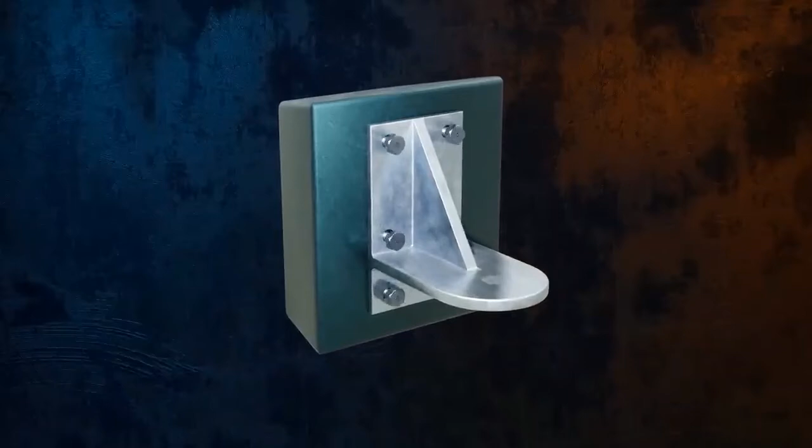We know that when we apply loads to an object, like this bracket, if we keep increasing the magnitude of the load, at some point the material will fail. But how can we predict when static failure will occur? What level do the stresses in the object need to reach for it to fail?

First, we need to define what failure is. For ductile materials, failure is usually considered to occur at the onset of plastic deformation, and for brittle materials, it occurs at fracture. These points are easy to define for a uniaxial stress state, like a tensile test. They occur when the normal stress in the object reaches the yield strength of the material for ductile materials, and the ultimate strength for brittle materials.

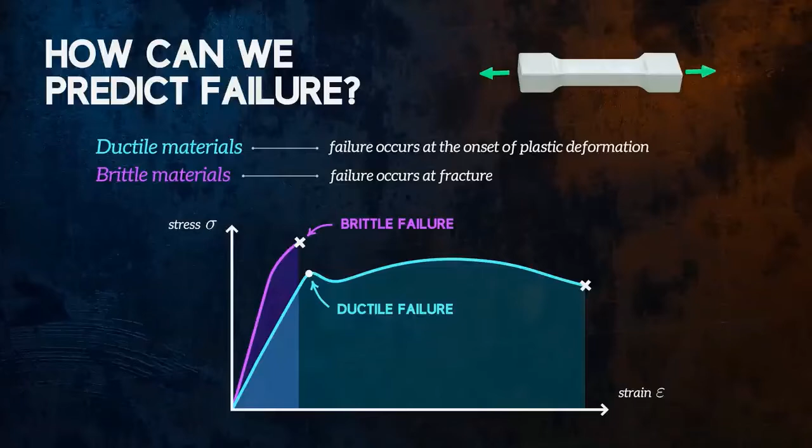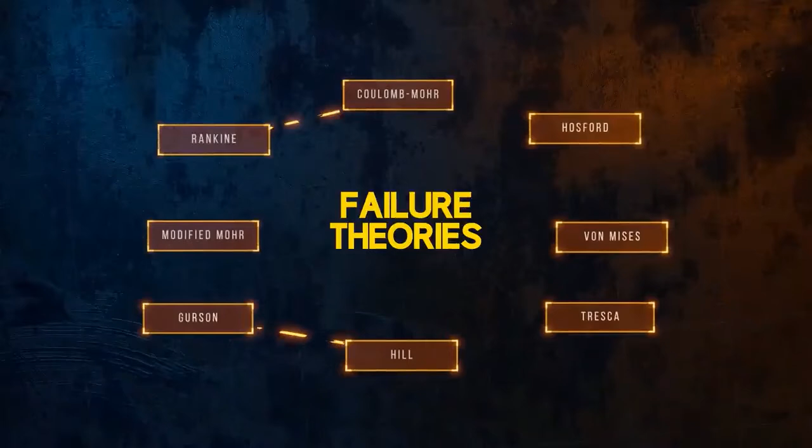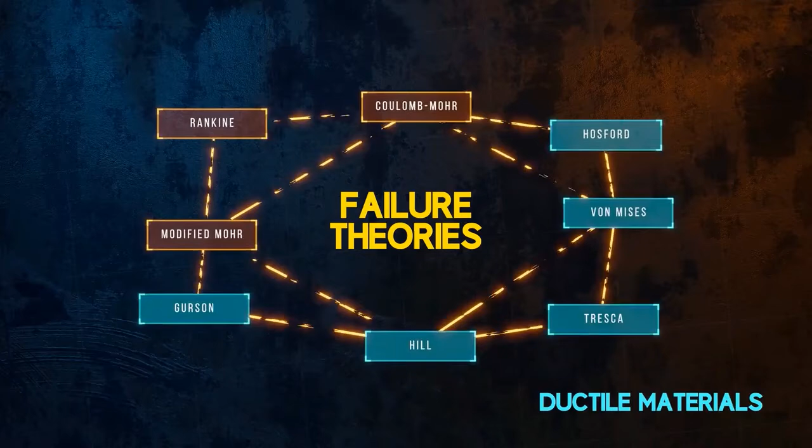But for a more complex case of triaxial stress, predicting failure is much less straightforward. In fact, it's so difficult to predict that we don't have one universally applicable method. Instead, we have to predict failure by selecting the most suitable one of a range of different failure theories, each of which we know works relatively well under certain circumstances, based on experimentation. Because they fail in fundamentally different ways, failure theories which apply for ductile materials usually aren't applicable for brittle materials, and vice versa. So what does a failure theory do?

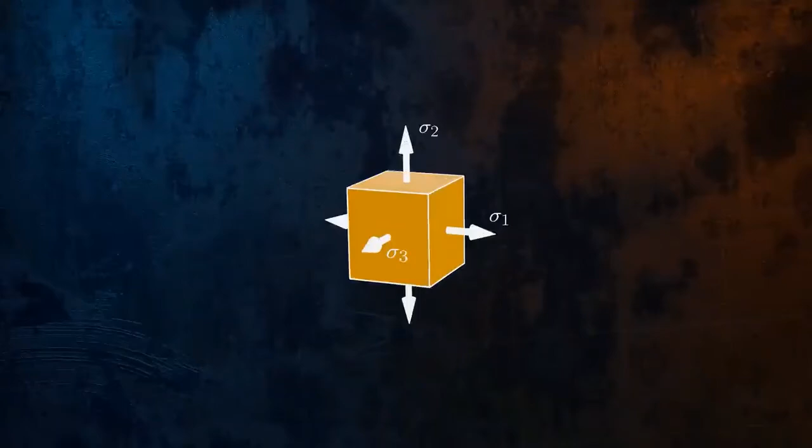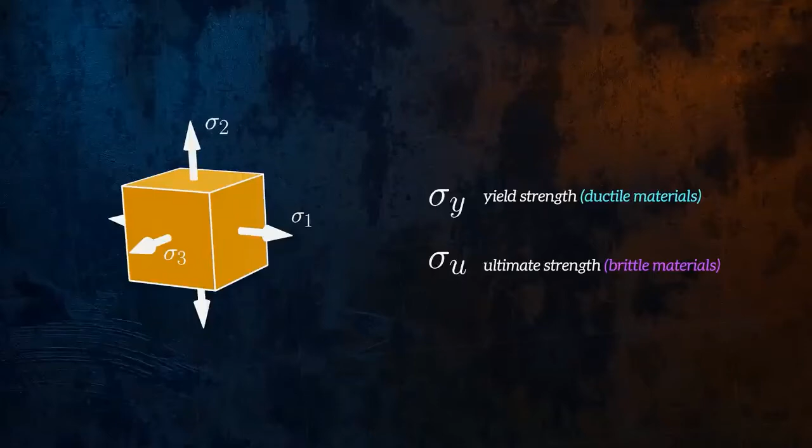It's quite simple. It allows us to predict failure of a material by comparing the stress state in the object we are assessing with material properties that are easy to determine, like the yield or ultimate strengths of the material that we can obtain by performing a uniaxial test. The stress state at a point can be described using the three principal stresses. So most failure theories are defined as a function of the principal stresses and the material strength.

Probably the simplest failure theory is to say that failure occurs when the maximum or minimum principal stresses reach the yield or ultimate strengths of the material. This is called maximum principal stress theory, or Rankine theory. Although it's simple to apply, it's not actually a great failure theory, particularly for ductile materials, for reasons I'll explain later. Let's look at some better failure theories for ductile materials.

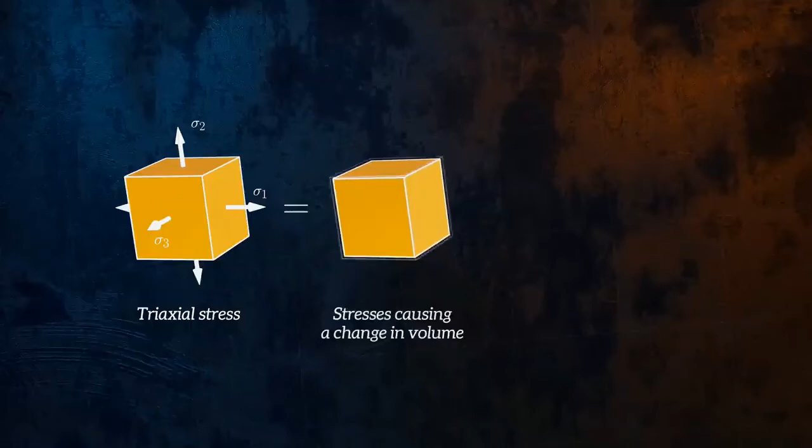Any good failure theory needs to be consistent with experimental observations we can make about how materials fail. There is one key observation that failure theories for ductile materials need to capture, which is the fact that hydrostatic stresses do not cause yielding in ductile materials. Let me explain. A general triaxial stress state, like the one shown here, can be decomposed into stresses which cause a change in volume and stresses which cause shape distortion.

Stresses that cause a change in volume are called hydrostatic stresses, because that is the type of stress acting on an object submerged in liquid. For a hydrostatic stress configuration, the three principal stresses are always equal, and there are no shear stresses. For a triaxial stress state, we can calculate the hydrostatic component as the average of the three principal stresses.

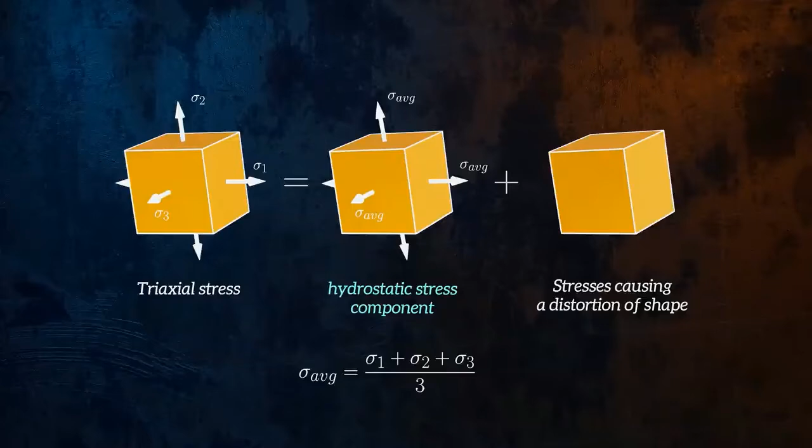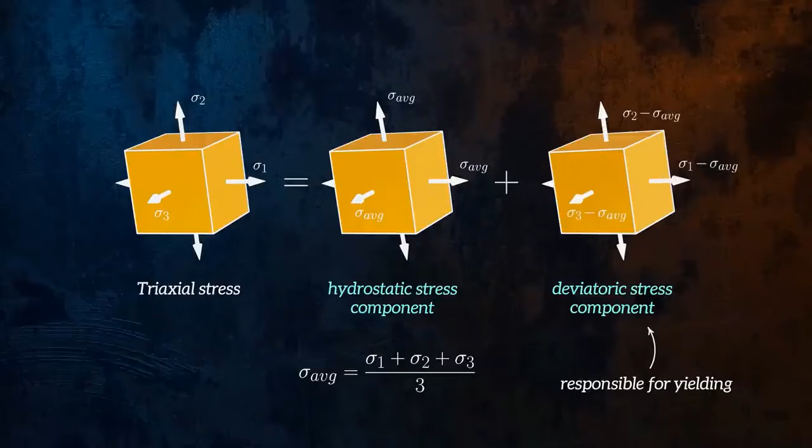The mechanism that causes yielding of ductile materials is shear deformation. Since there are no shear stresses for a state of hydrostatic stress, this component can be very large and still not contribute to yielding. Yielding is only caused by the stresses which cause shape distortion. These are called deviatoric stresses. The deviatoric component is calculated by subtracting the hydrostatic component from each of the principal stresses. The hydrostatic and deviatoric components can be expressed in matrix form, like this.

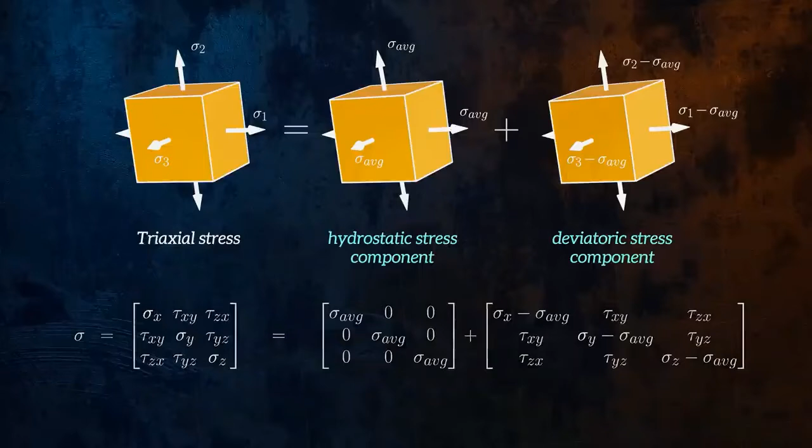Here we have described the stress state using the principal stresses, but we could also describe it for an arbitrary orientation of the stress element. It can be helpful to use Mohr's circle to understand the hydrostatic and deviatoric components of a triaxial stress state. For a hydrostatic stress configuration, there are no shear stresses, and so Mohr's circle reduces to a single point, equal to the average of the three principal stresses. Shifting Mohr's circle horizontally represents an increase in the hydrostatic component. And increasing the radius of Mohr's circle without changing the average stress represents an increase in the deviatoric component.

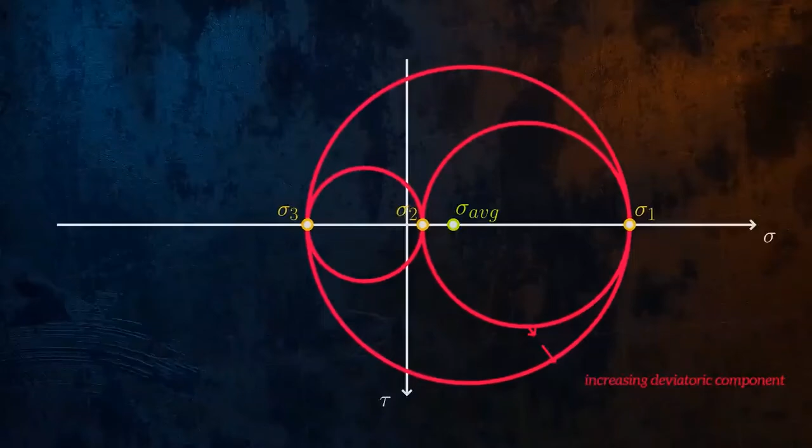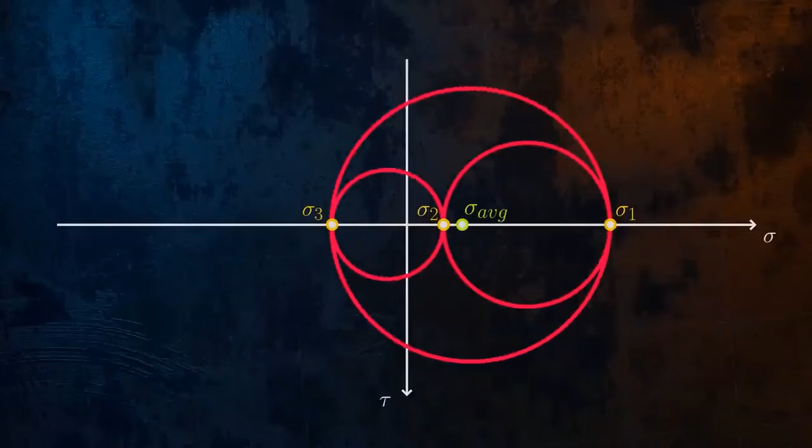Since failure of ductile materials only depends on the deviatoric component, a good failure theory for ductile materials should produce the same result regardless of where Mohr's circle is located on the horizontal axis. This explains why maximum principal stress theory is not a good failure theory for ductile materials. It isn't consistent with the observation that yielding is independent of hydrostatic stress.

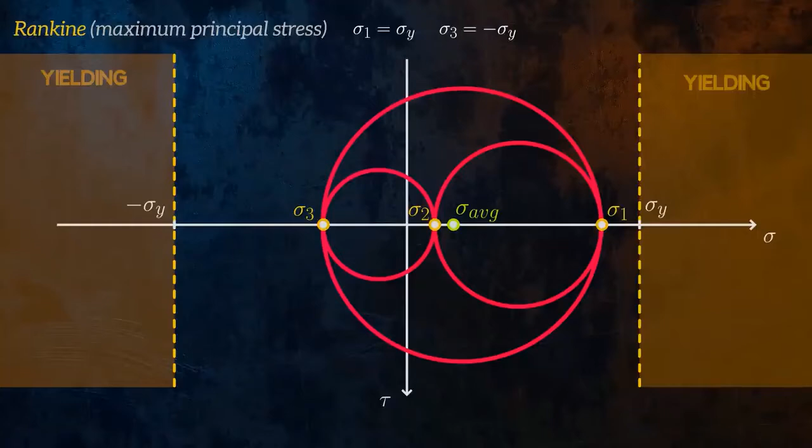Two failure theories which are consistent with this observation are the Tresca and von Mises failure criteria. These are the two most commonly used failure theories for ductile materials. Let's start with the Tresca failure criterion, which is also called the maximum shear stress theory. It is named after the French engineer Henri Tresca, and it states that yielding occurs when the maximum shear stress is equal to the shear stress at yielding in a tensile test.

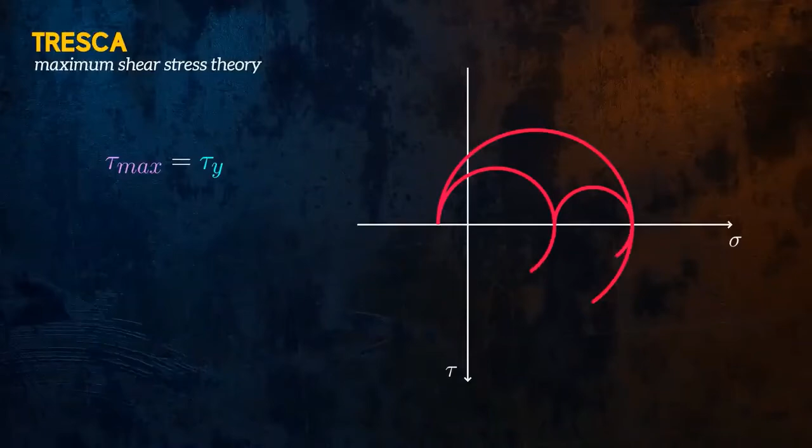This can be defined mathematically, like this, and graphically using Mohr's circle, like this. This theory is consistent with the observation that hydrostatic stresses don't affect yield. It doesn't care where Mohr's circle is located on the horizontal axis.

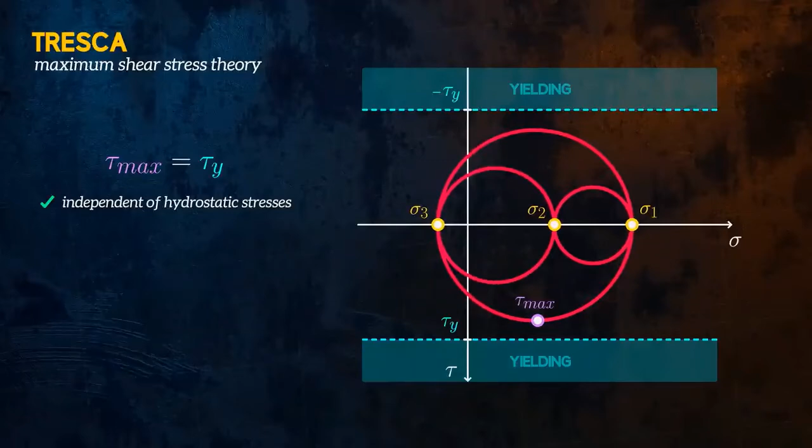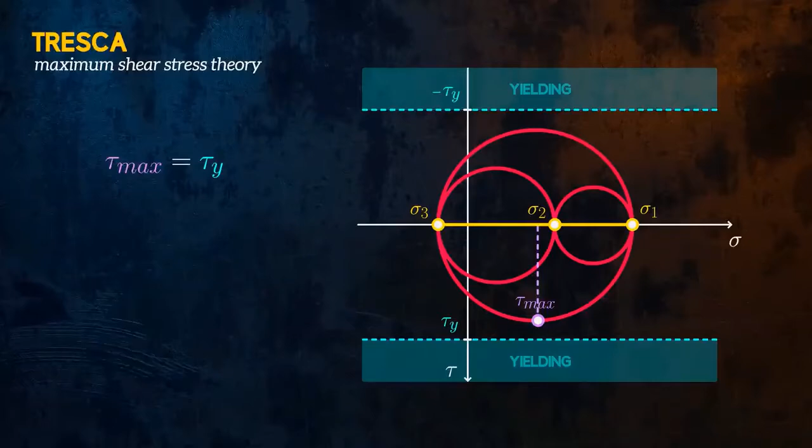It's common to express this theory as a function of the principal stresses, instead of as a function of the shear stresses. We can see, based on Mohr's circle, for a triaxial stress state, that the maximum shear stress is equal to the radius of the outer circle, which is the difference between the maximum and minimum principal stresses, divided by 2. Mohr's circle for a uniaxial tensile test at yielding looks like this.

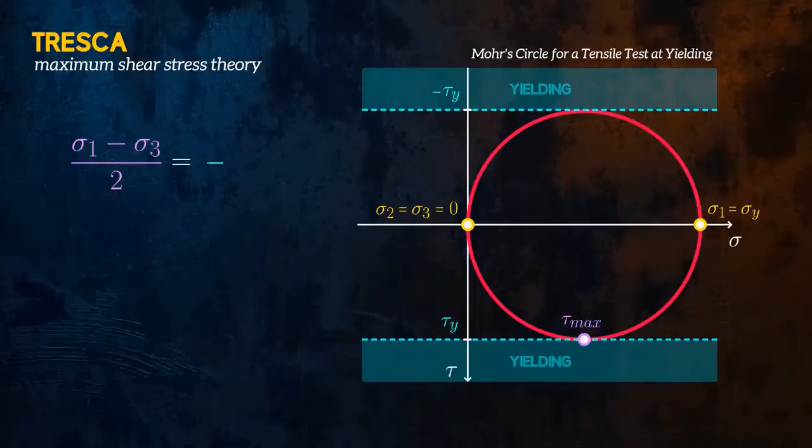The intermediate and minimum principal stresses, sigma 2 and sigma 3, are equal to 0, and the maximum principal stress, sigma 1, is equal to the yield strength of the material. The shear stress at yielding is equal to half of the yield strength of the material, so we can rewrite our equation to obtain the standard formulation for the Tresca theory.

Let's look at the von Mises failure criterion next, which is also called the maximum distortion energy theory. It was initially developed by the Austrian scientist Richard von Mises, but a number of others were involved in refining it, so it is sometimes called the Maxwell-Huber-Hencky-von Mises theory. It states that yielding occurs when the maximum distortion energy in a material is equal to the distortion energy at yielding in a uniaxial tensile test.

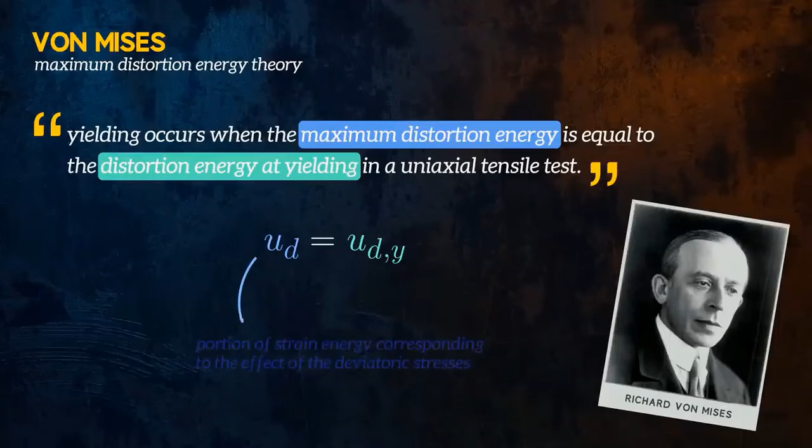So what is the distortion energy? It is essentially the portion of strain energy in a stressed element corresponding to the effect of the deviatoric stresses. The distortion energy per unit volume can be calculated from the principal stresses using this equation. We know that at yielding during a tensile test, the maximum principal stress is equal to the yield strength of the material, and the two other principal stresses are equal to 0. So we can calculate the distortion energy at yielding in a tensile test by plugging in the appropriate principal stress values.

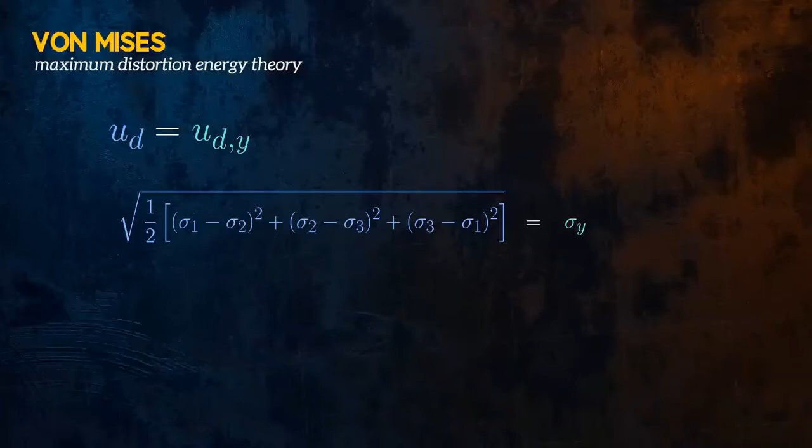And by equating the distortion energy at yielding with the general equation for a triaxial stress state and rearranging a bit, we get an equation that defines the von Mises failure criterion. Again, we can see that this theory considers the difference between principal stresses and so is independent of the hydrostatic stress. The term on the left is often called the equivalent von Mises stress. If it is larger than the yield strength of the material, yielding is predicted to have occurred.

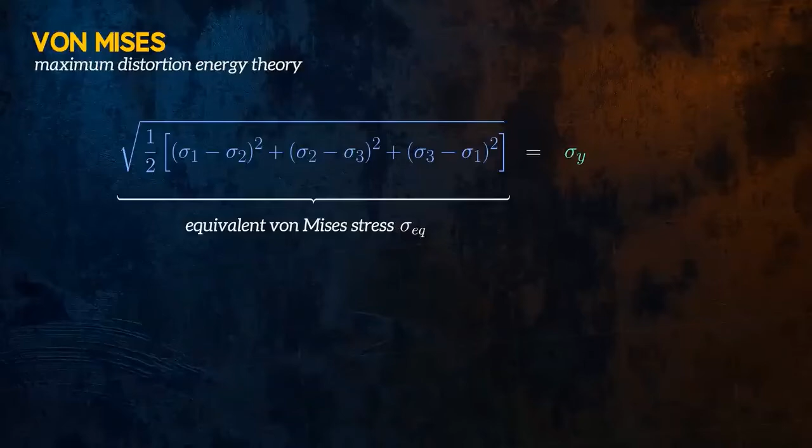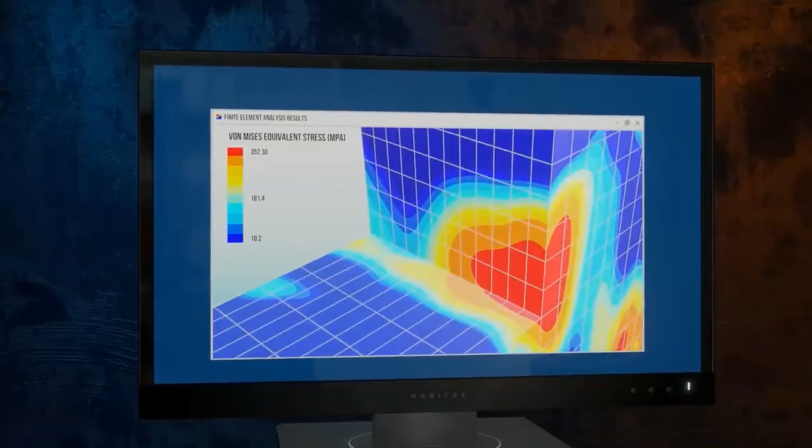The equivalent von Mises stress is a common output from stress analysis performed using the finite element method. Contour plots are typically generated to show the distribution of the von Mises equivalent stress within a component, as these allow areas at risk of yielding to be identified.

When comparing failure theories, it can be useful to plot their yield surfaces. A yield surface is the representation of a failure theory in the principal stress space, which sounds more complicated than it actually is. To keep things simple, let's start by considering a plane stress case, where one of the three principal stresses is equal to 0.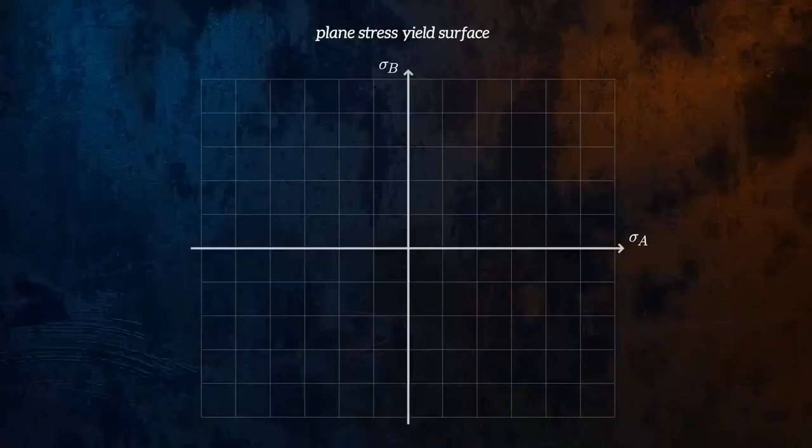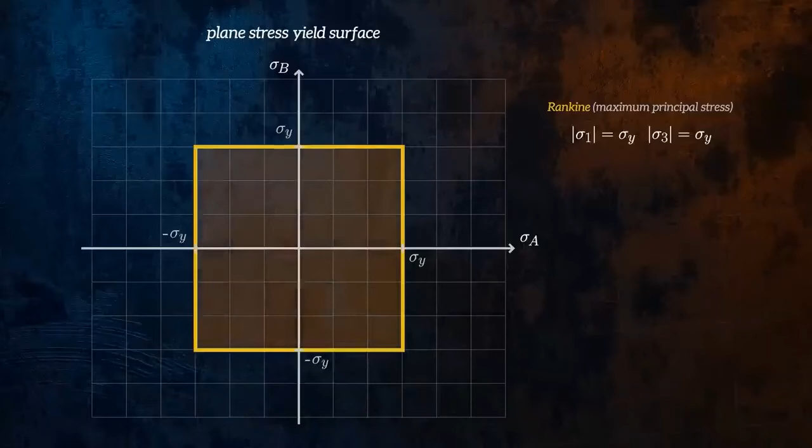The yield surface for the maximum principal stress theory is easy to plot. It says that yielding begins when either of these principal stresses is equal to the yield strength of the material, so it looks like this. Yielding is considered to have occurred when the stress state reaches this line.

Next, let's plot the yield surface for the Tresca theory. This theory states that yielding occurs when the difference between the maximum and minimum principal stresses is equal to the yield strength of the material. But it's not as simple as taking the difference between sigma A and sigma B. Plane stress is still a three-dimensional stress state.

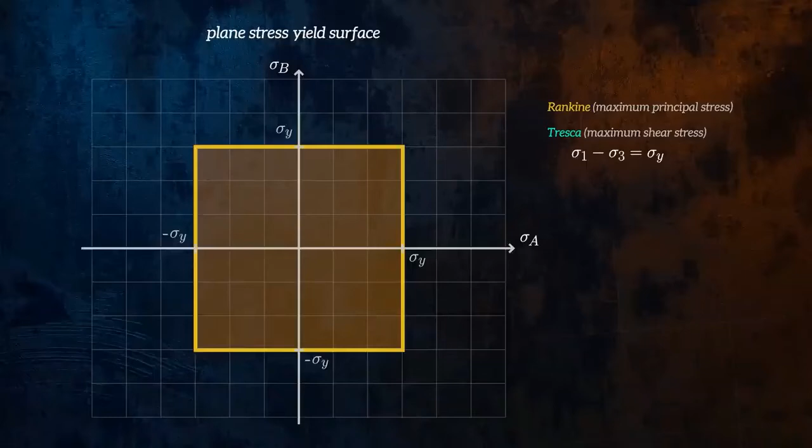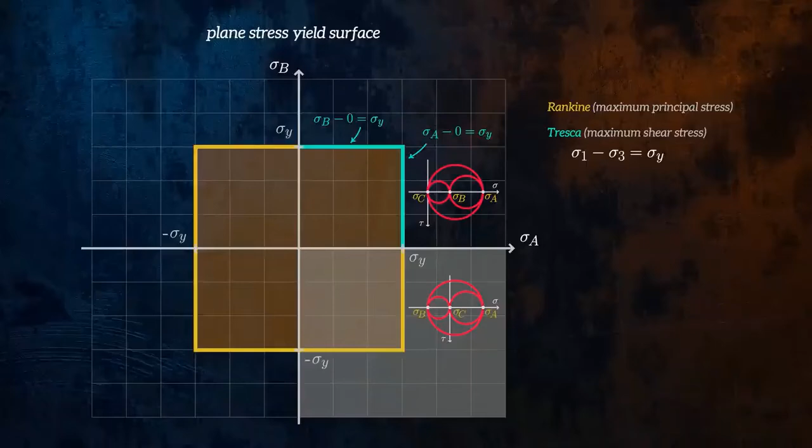In the top right quadrant of the graph, both sigma A and sigma B are positive, and so sigma C, which is equal to 0, is the minimum principal stress. The yield surface looks like this. But in the bottom right quadrant, sigma B is negative, and so sigma B is the minimum principal stress. That gives us a yield surface that looks like this. Repeating this process for the other two quadrants completes the Tresca yield surface.

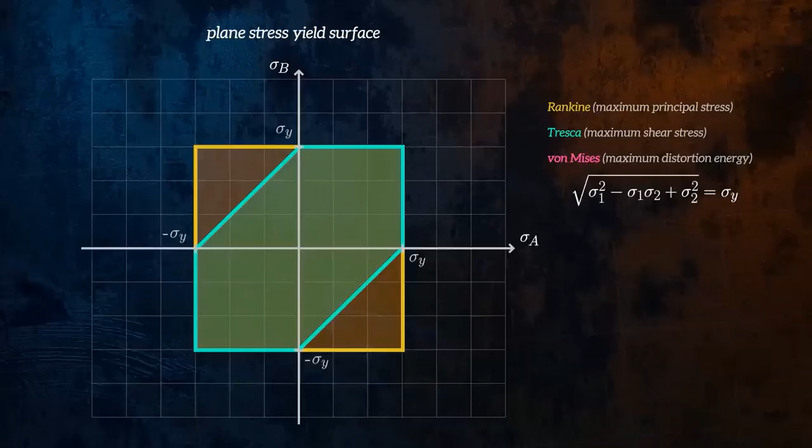Von Mises' yield theory for plane stress conditions is defined using this equation when expressed in terms of the principal stresses. We can square both sides of the equation and see that it is of the same form as an ellipse, which gives us the von Mises yield surface.

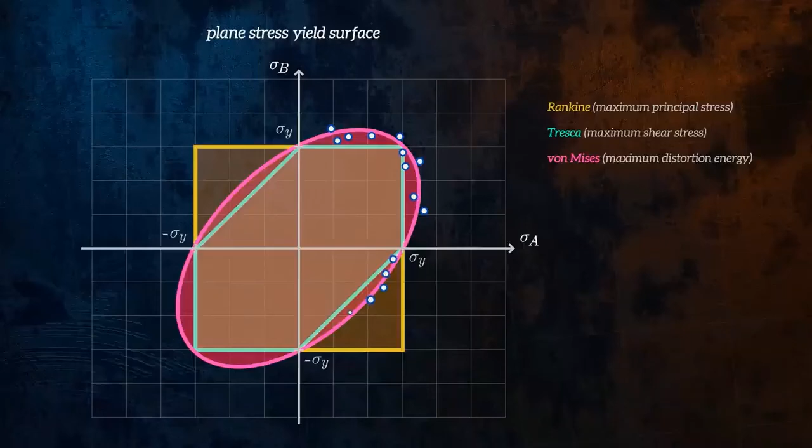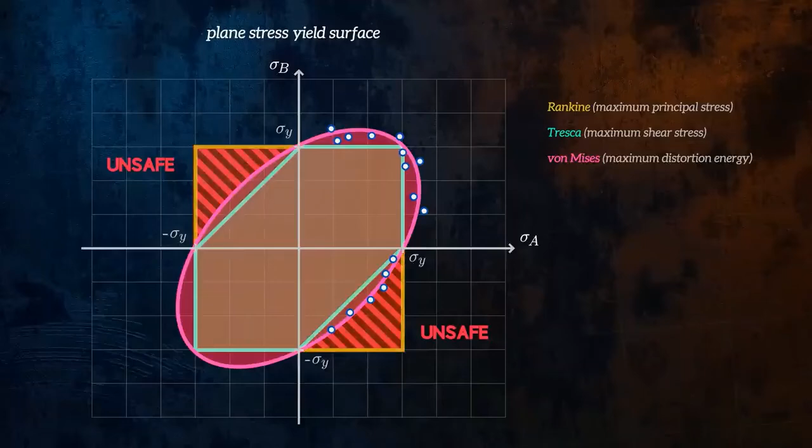Let's plot some experimental data for tests performed on ductile materials and see how each of these theories compares. It's clear that the maximum principal stress theory has large areas where its use is potentially unsafe. So let's get rid of it and compare Tresca and von Mises. Both agree well with experimental observations, although von Mises agrees slightly better. The Tresca yield surface lies entirely inside the von Mises surface, meaning that Tresca is more conservative.

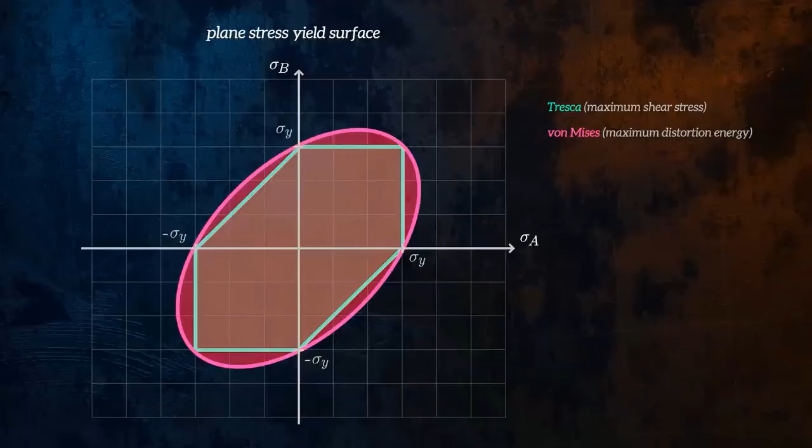If we assume that the principal stresses will increase in proportion to one another as a load is applied, and so the stress paths are straight lines, the difference between the Tresca and von Mises theories is largest for these three configurations. The maximum difference between the two theories can be calculated to be 15.5%. Von Mises is usually preferred to Tresca because it agrees better with experimental data, but Tresca is sometimes used because it is easier to apply and it is more conservative.

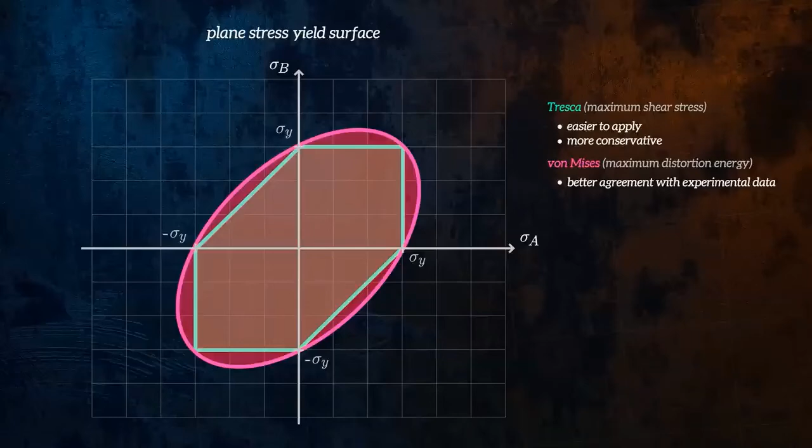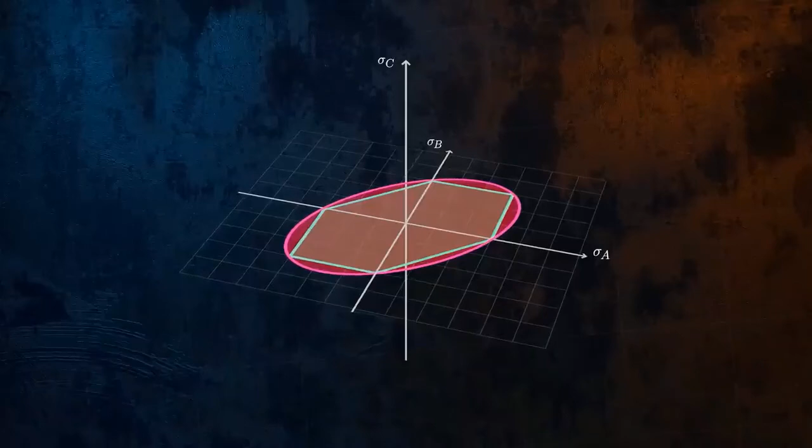So far, we have looked at a plane stress case, with sigma C equal to 0, but for a general three-dimensional stress state, sigma C will be non-zero. We know that the Tresca and von Mises yield surfaces aren't affected by hydrostatic stresses, and so to obtain the yield surfaces in 3 dimensions, we just need to extend the plane stress yield surfaces along the hydrostatic axis.

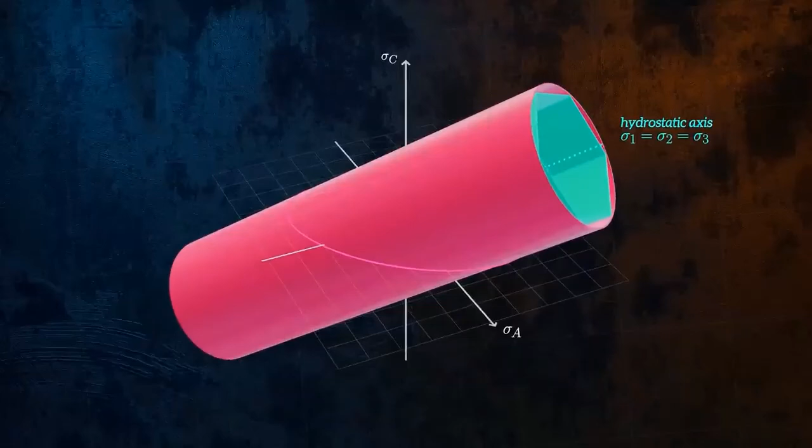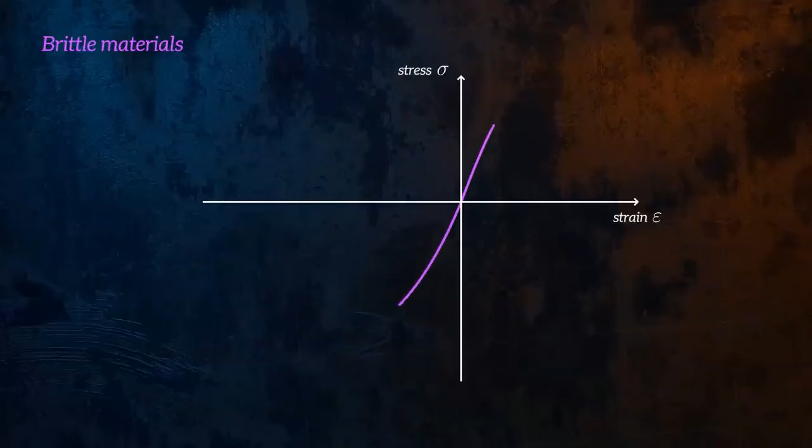Failure of brittle materials is different to failure of ductile materials. For brittle materials, failure is considered to occur by fracture rather than yielding. And unlike ductile materials, brittle materials tend to have compressive strengths that are much larger than their tensile strengths. This needs to be captured in any failure theory for brittle materials. It also means that to assess failure of brittle materials, we need to know 2 separate ultimate strengths, for tension and for compression.

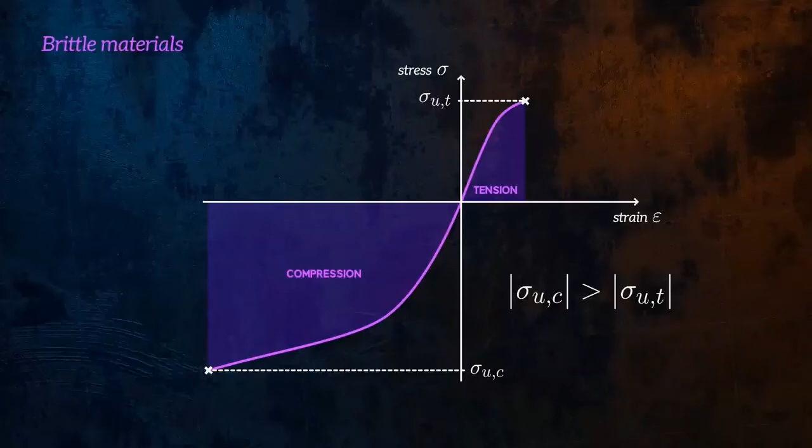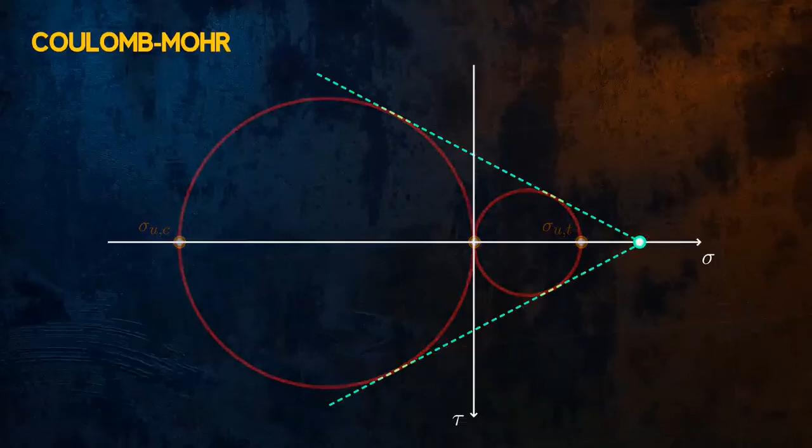Coulomb-Mohr theory is a failure theory often used for brittle materials. Unlike the theories we have seen for ductile materials, it considers failure to be sensitive to hydrostatic stresses and captures the difference between tensile and compressive ultimate strengths. The easiest way to define this theory is using Mohr's circle. We start by drawing the Mohr's circles corresponding to failure in the uniaxial tensile and compressive tests. By drawing lines tangent to both circles, we create a failure envelope. Coulomb-Mohr theory states that a material will fail for a stress state with a Mohr's circle that reaches this envelope.

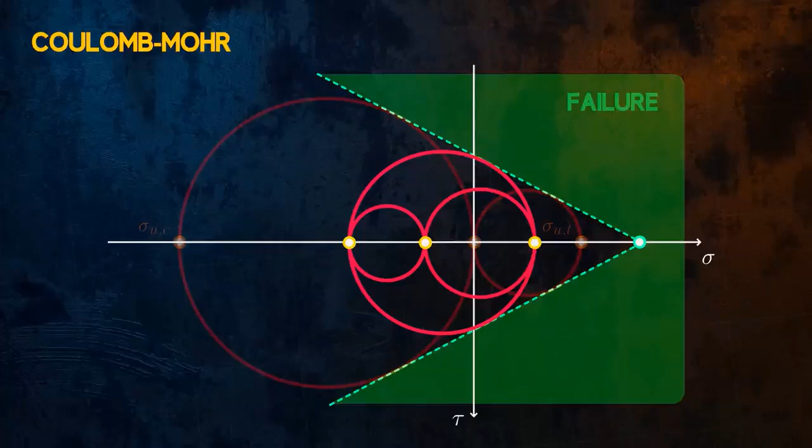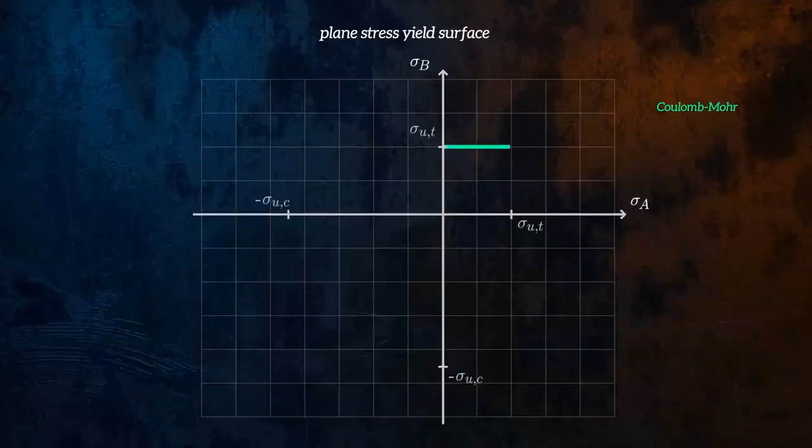The Tresca yield criterion we saw earlier is actually a special case of the Coulomb-Mohr failure theory, where we have the same material properties in tension and in compression. The plane stress failure surface for Coulomb-Mohr theory looks like this. As you can see, it doesn't agree particularly well with experimental data in the bottom right quadrant.

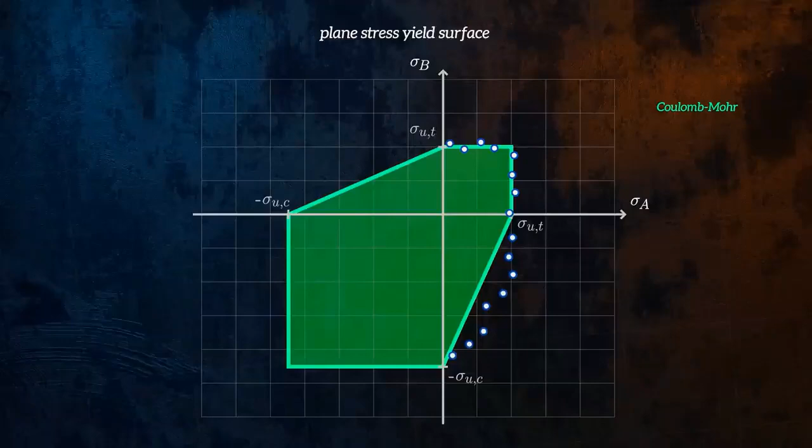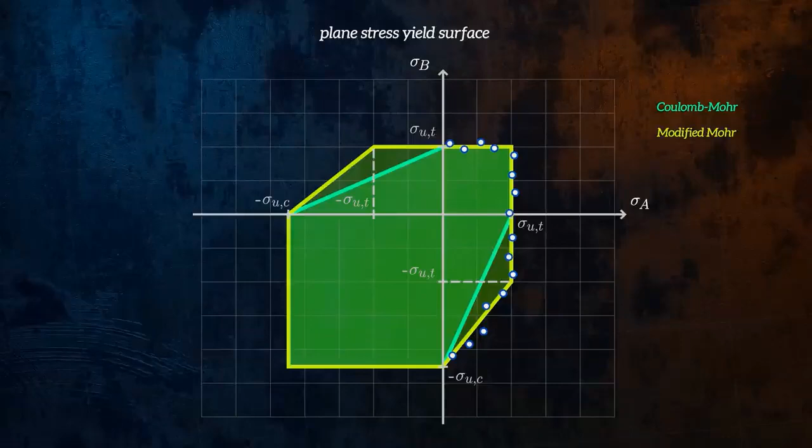Modified Mohr theory is a slight variation on the theory which better fits experimental data. It is one of the preferred general failure theories for brittle materials. Because failure theories for brittle materials need to account for the effect of hydrostatic stresses, these failure theories converge to a point when extended along the hydrostatic axis.

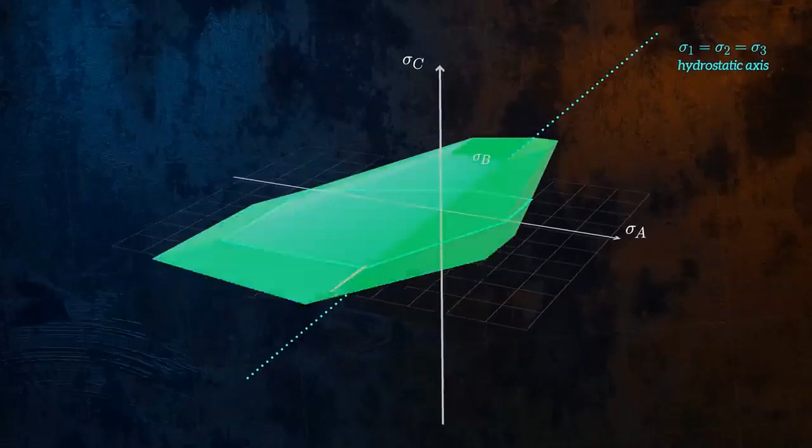And that's it for this introduction to failure theories. We've covered the most common theories, but there are many more out there which may be more appropriate for specific scenarios.